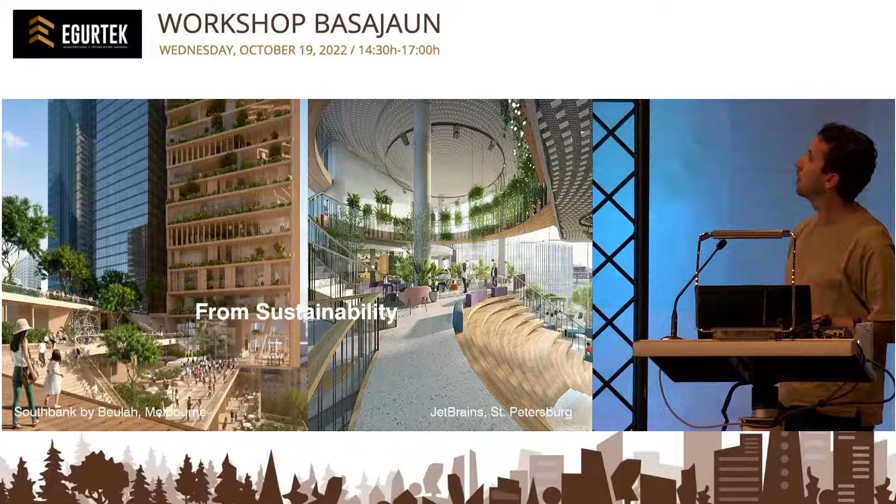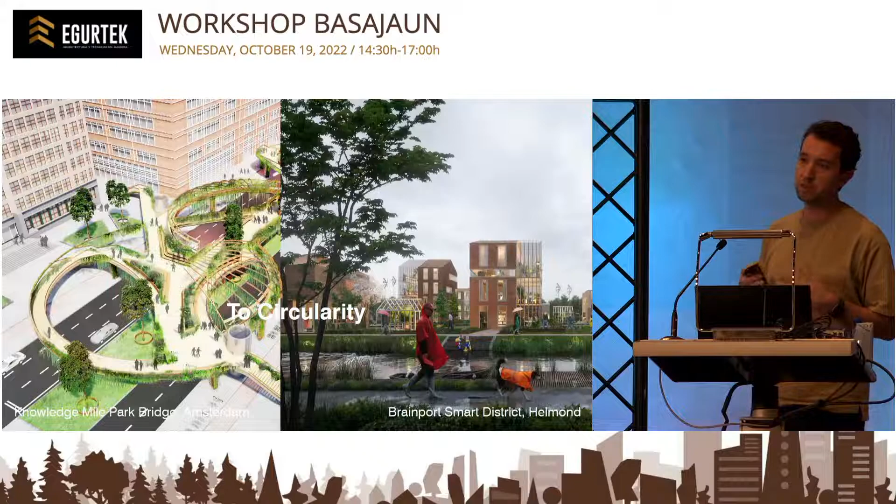So circularity we touched upon. Here are some projects from UN Studio, a project in wood in Amsterdam, also projects that have a lot of intelligence in them in the sense of sensors and computer-driven mechanisms that organize data and organize your life.

And eventually also energy positive buildings. So this is an educational building we did in the Netherlands, in Delft, partially in wood and also net positive in the energy production. And again, the smartest neighborhood in Europe.

So a range of projects, and today we would like to talk about Basajaun. It's a European funded research project with partners throughout Europe, from Spain, France, Finland, a number of other countries.

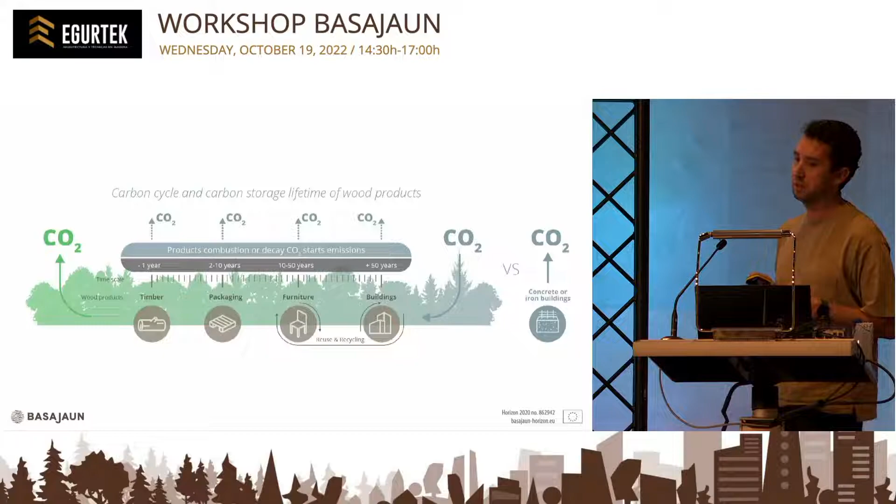And the goal was to look at the supply cycle of wood because of the obvious benefits of wood. It's readily available in Europe, it embodies carbon. And we wanted to use the supply chain of wood to include it into the building industry practice. And for that, the project is set up in a number of work packages, looking at these topics.

And each of them brings the knowledge to the project, first in digital form, then it's produced throughout Europe again, all the way up to Hungary. It's tested, and that's how we work together - up to now quite successfully.

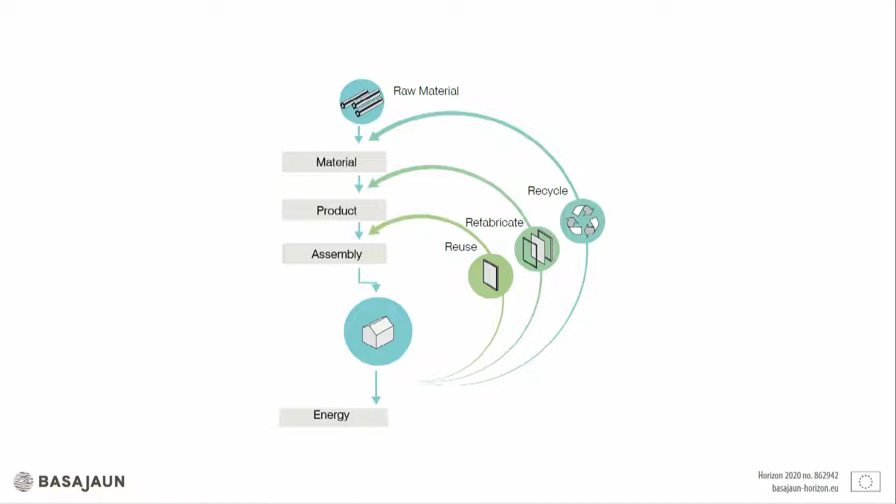And really looking at, we start with the raw material in the forest, so tree trunks, and then see how we can really upgrade it to a product and then assemble it in the architecture. First looking at how we can optimize the resources, then from forest products into sub-products, then in systems.

So a system in architecture is, for example, a window with a window frame, or a partition or a roof panel, all modularized and described in our computer model, and then put together to experimental pilot building.

And the last step, and I think that's at the end of the process, is also the fact you put everything together, but how can you take it apart in a smart way so you have the least possible amount of waste. So this goes back to cradle-to-cradle principles and how you can reuse materials in a smart way.

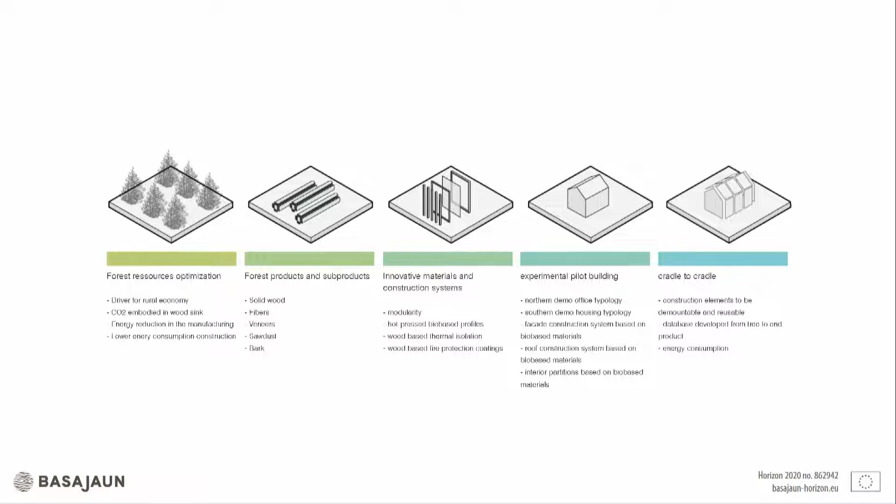So for the pilot buildings, I think those are nice to see. We have 2 pilot buildings. For the EU, it's very important that the topic is applicable over the wider European market. So we have 1 pilot building all the way up in the high north in Finland, and 1 in the south of France, in the Gironde.

And both of these buildings are dealing with very different culture of building, different climate. And in a way, these represent the different situations you might find in the European Union.

So this is Jyväskylä. Yeah, it's a beautiful site along a lake in the middle of Finland. And you see the extensive forest there. So this is definitely a theme. Here you see the project site.

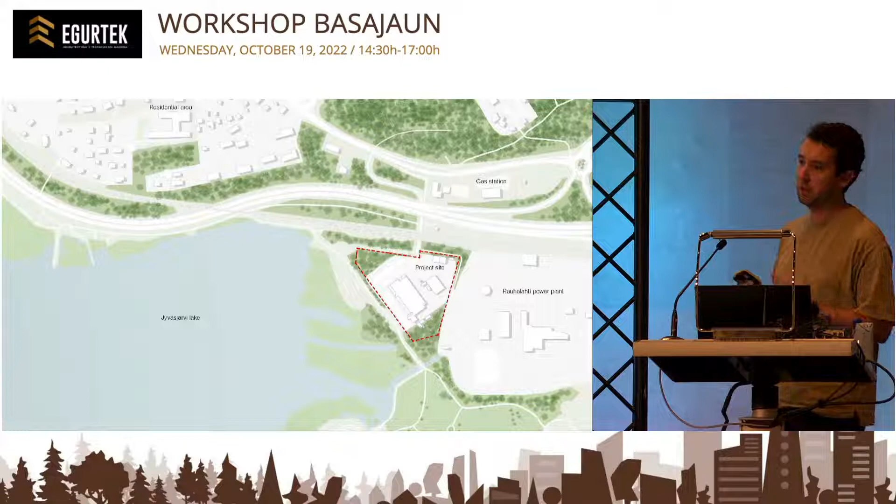It's on the location of our partner VTT. And the idea is that they have an office there, and the demo building we're making is intended to be a place where they can invite people, have meetings, possibly talk about this topic, but just a very kind of friendly and open meeting place with a nice view of the lake.

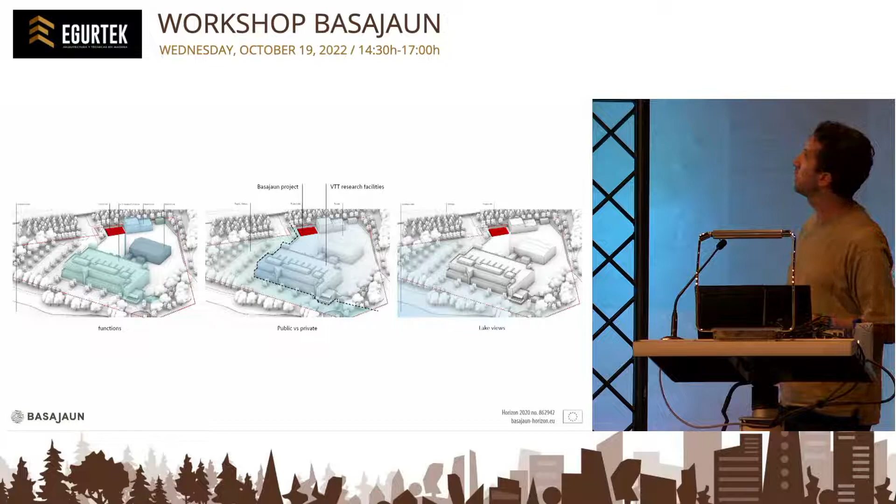We were inspired by the natural features. So the woods arriving there, and we tried to integrate it into the site. And what you can see to the top is the road coming in, and in the red location that's our plot. And it's the first moment you see the site, you see the building, and that's where your experience starts.

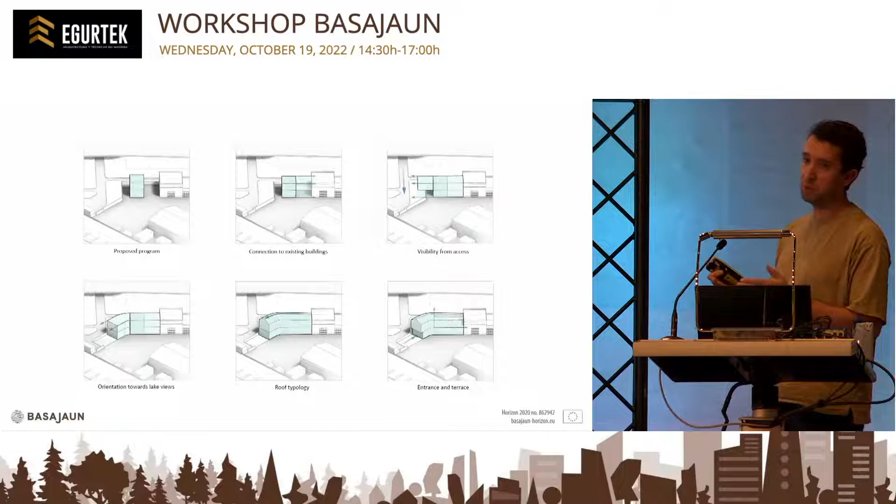There's been a whole process of different back and forth, testing things, looking at the geometry. But the key thing is that we connect to the other buildings. And the meeting space in the building has a very nice large window overlooking the lake. So here you see an early iteration. So we worked closely both with the partners and with VTT to see what the functionality of the building should be.

And at a very early phase, there were different manufacturers who looked at the glazing, the roof, the partitioning, and the facade.

Here you see the first design model, so it's just a sketch basically. But from the sketch, as you can see, we started to add more detail. Here you see all the interior partitioning in plywood.

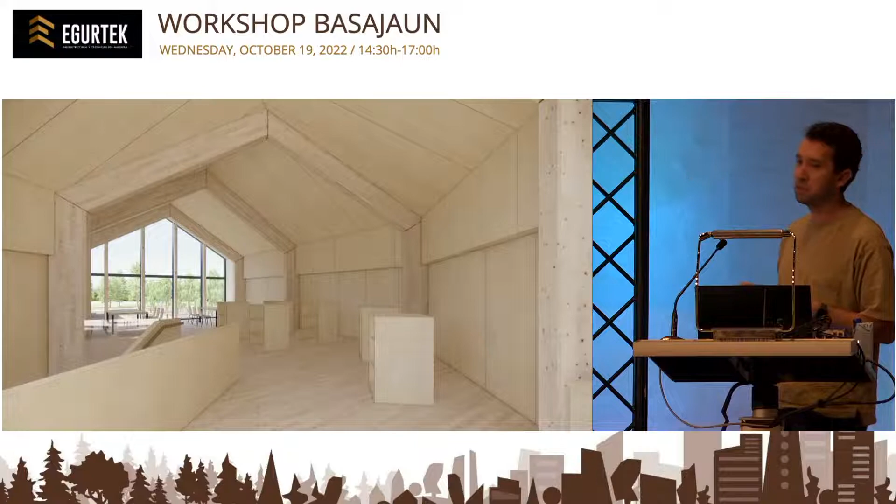Here you see some of the drawings generated in our building information model, in a software called Revit. That's where you can organize all these different building elements and track them back into the supply chain. That's quite a conventional procedure in the building industry, but it's our intent to go from the building back into the model and eventually to the supply chain in the forest, to really create that link within Europe. How do you use your wood?

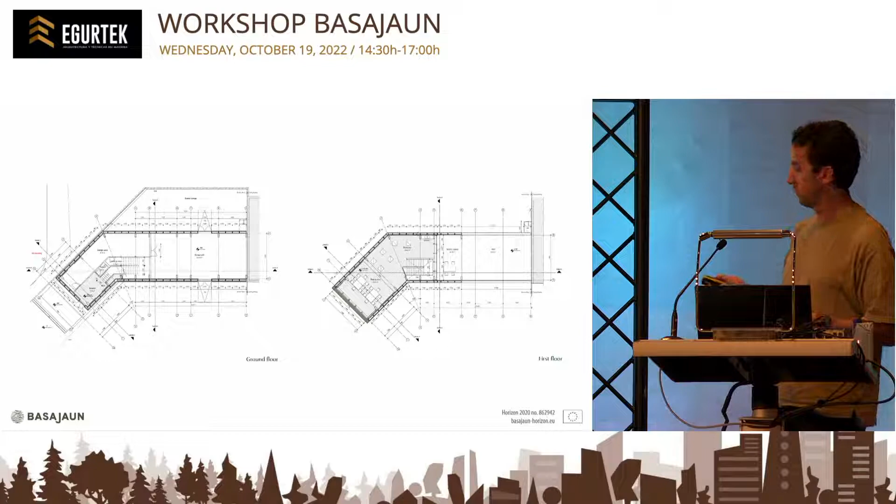Here you see sub-models between the main model. So a very important part is, for example, the structure.

The structure is a glulam structure produced by our partner Moelven in Sweden. They made the structural model, which is coordinated with the facade model from a company called I NAR from Madrid. This was done through meetings, but also in this digital environment, so we as a team throughout Europe could work together on this project.

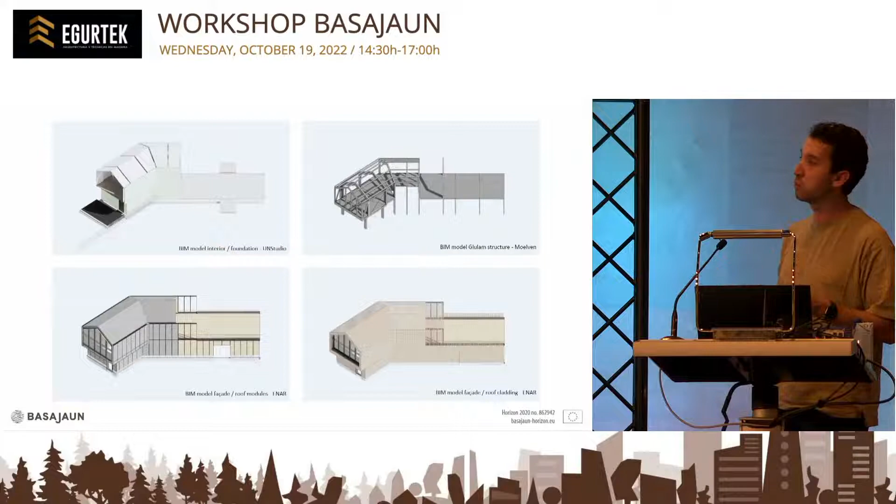Coming to the other building, this is the southern demo building. It's a residential project. There were already big plans for a school. We were not the architect of the school itself, but the architect was kind enough to let us take the residential part, the teachers' housing, for the Basajaun project.

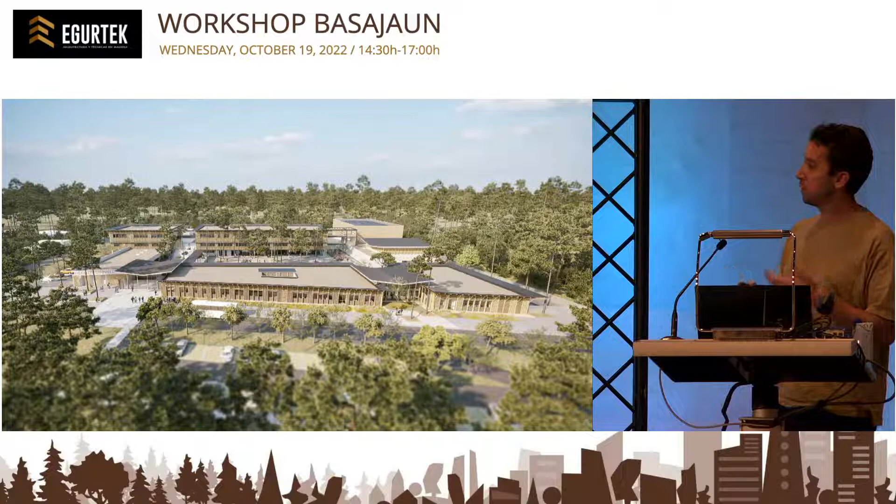Together with the French architect, we worked on that project. This school is built out of concrete on the inside, and on the outside it's clad with very nice wood. But for the Basajaun project, it was the goal to make the complete building in wood.

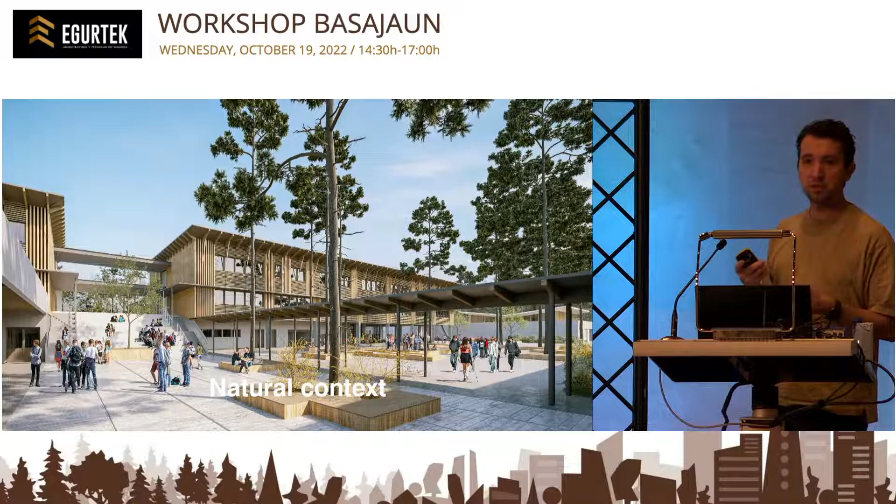So this is the project site near Bordeaux. Again, the school, just to get a feel of the existing design. In red, we are located next to the school. Together with the French architect, we tried to follow the initial design ideas so we could fit in with the overall site.

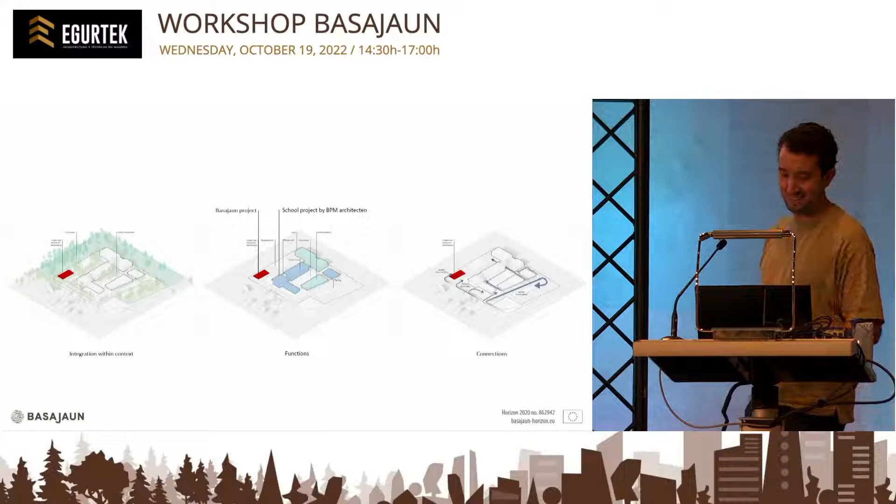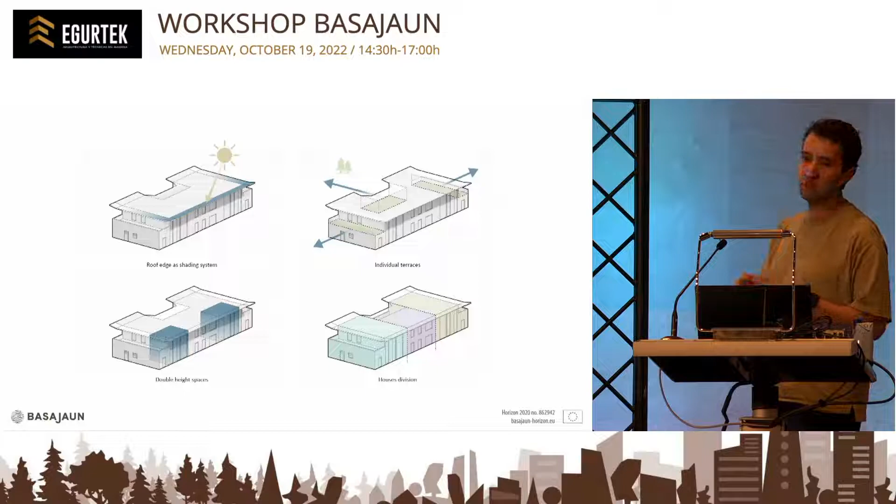Here you see a number of design exercises we did. Apart from working with wood, we also tried to apply sustainable strategies that we call passive measures. We looked at the geometry of the roof to provide shading, so the building requires less cooling. We did options on placing terraces and shaping these houses, and this is how the early sketch looked.

It was again coordinated in the Revit model. So you see here the three houses set up with all the modular elements that we are also providing for the finished project, so there's a system that can be used for both projects throughout Europe.

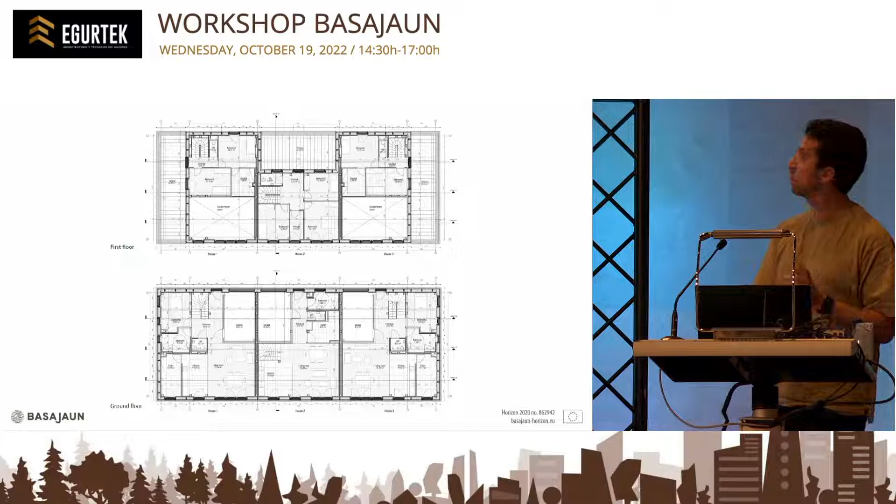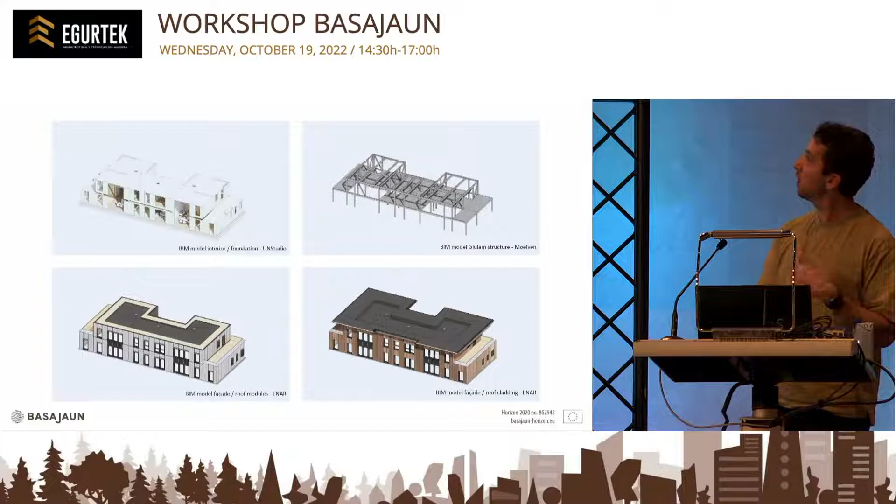With that system you can make very different designs. One is an office building and this is a housing building. Looking at the submodels, there's a similar story to how the intelligence is built into the project, but with very different results.

Then together with our partners, some of the systems, for example the windows, the partitions, and the roof, were also made smarter.

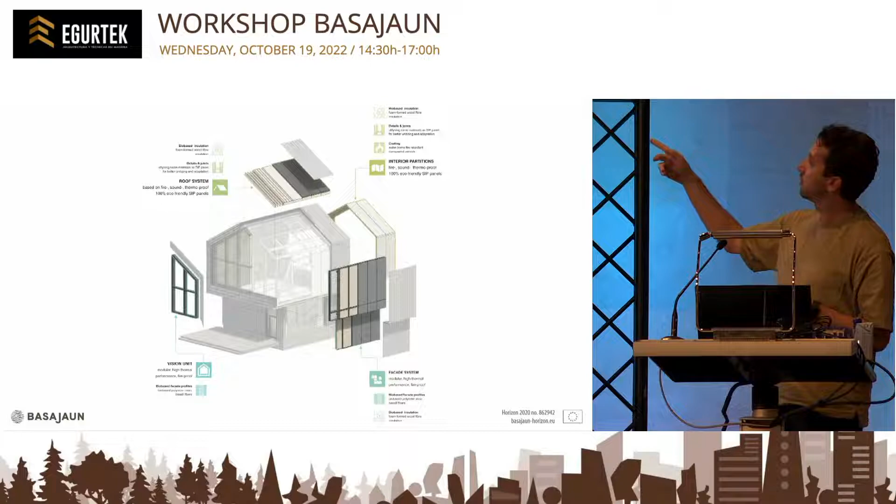Going all the way down to the technical details, like how this is assembled and what the different layers are, just to give insight into what's possible with this nice product. Here you see how the window is built up. Normally you'd expect window frames in aluminium or massive wood, but here it's done in biocomposite, which is very innovative and actually quite difficult to produce still.

But it's some of the more fundamental research that we are undertaking for the EU, and hopefully we can also bring this to the market later.

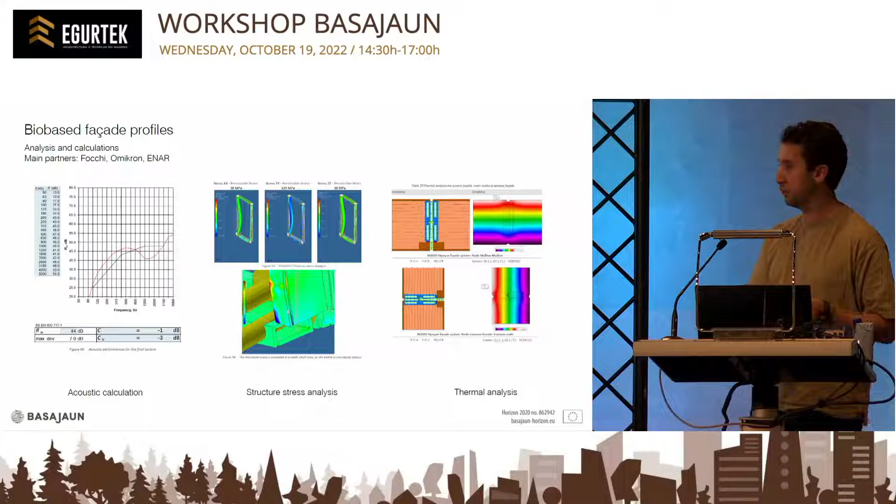All the testing needed, especially on new products. I think Finnish regulations are very strict. There are very strict procedures that you need to go through to get approval, so you're actually allowed to build. So we did testing on fire, noise, wind—all of this properly documented.

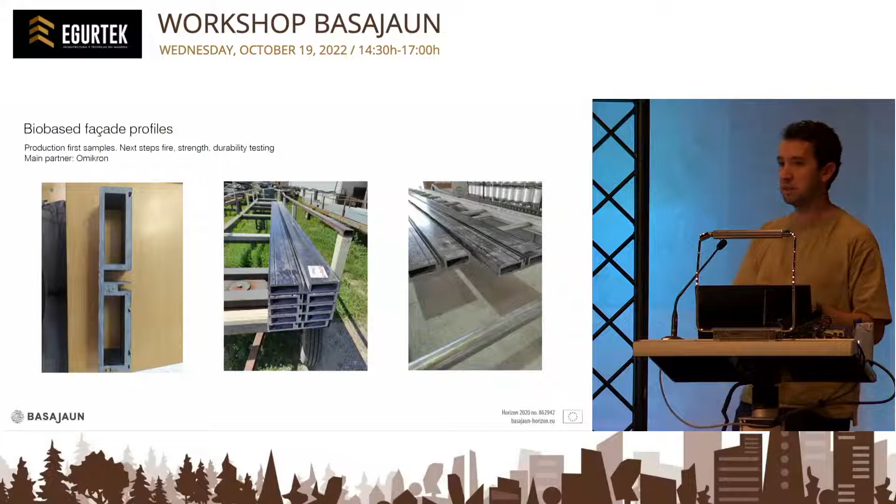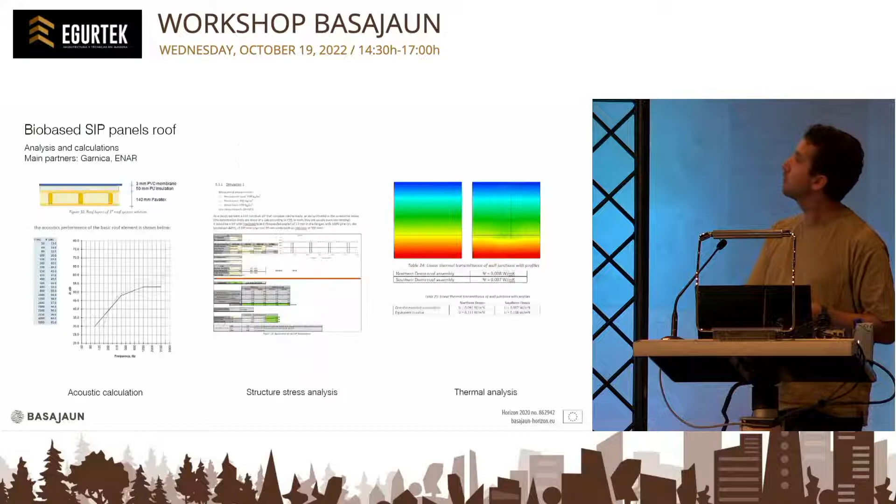Here you see some of the nice profiles. It looks a little bit like wood, but it's really based on this kind of composite. Here's how it's assembled in the factory, and here you see the roof panels. So that's roughly where we stand now.

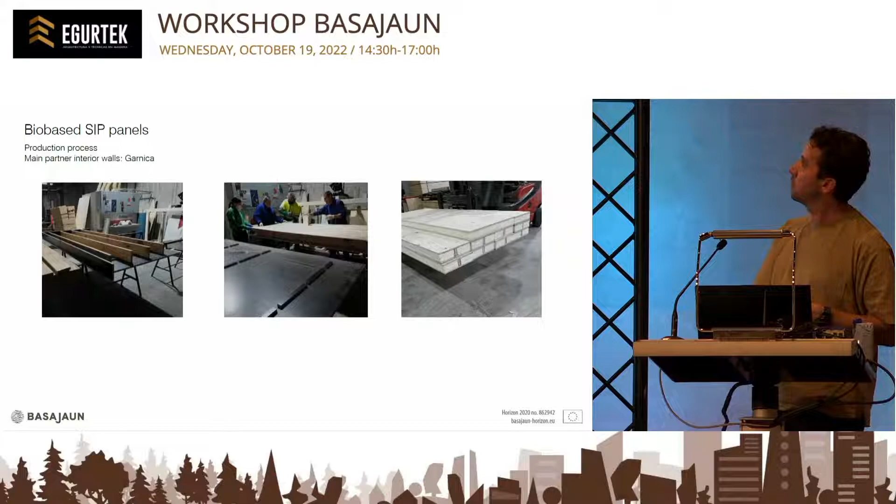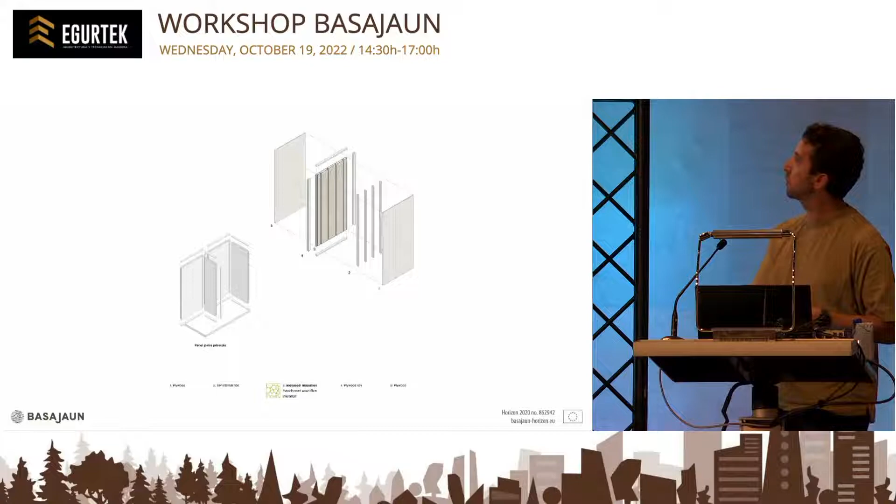The partition walls, and what I just want to touch upon still is the topic of: can it be reused? Also a very interesting topic. This has to do with how you put things together, and can you dismantle it later? If you put a lot of glue in everything, it's very difficult to take it apart and use the separate pieces in a practical way.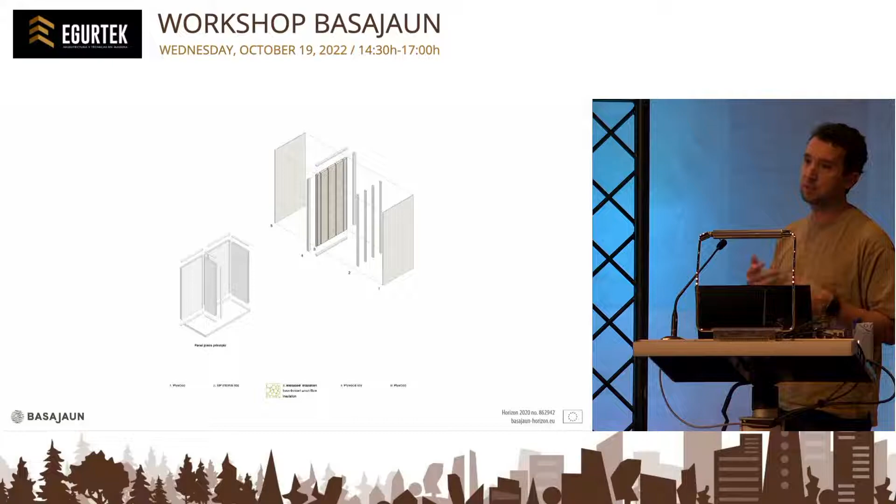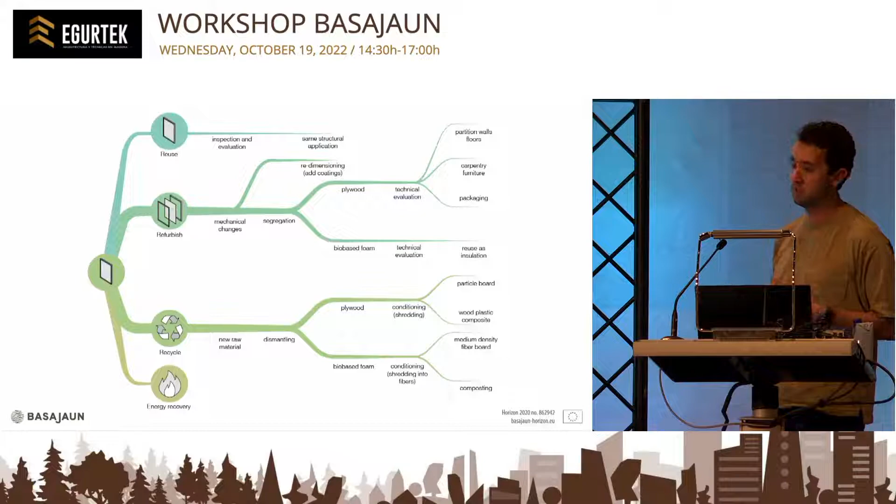But also in the detailing there's a degree of smartness to enable that. As we looked before at supply chains from forest into a product, into an architectural building, we could then turn it around and go from the building back to the window frame, to see what kind of future use it could have, to see if we can make this cradle to cradle in that sense. So testing is happening on that process too.

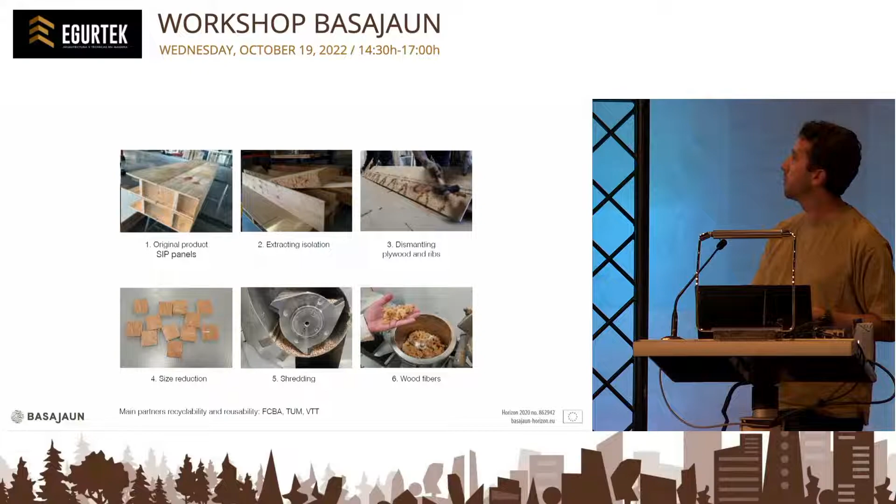So a lot of different engineering, designing, testing—a lot of fun stuff with wood. I hope I've given a nice overview also based on our demo buildings. And we'll finish with a movie just to give you a feel of what we're doing. So let me see if we can get this started.

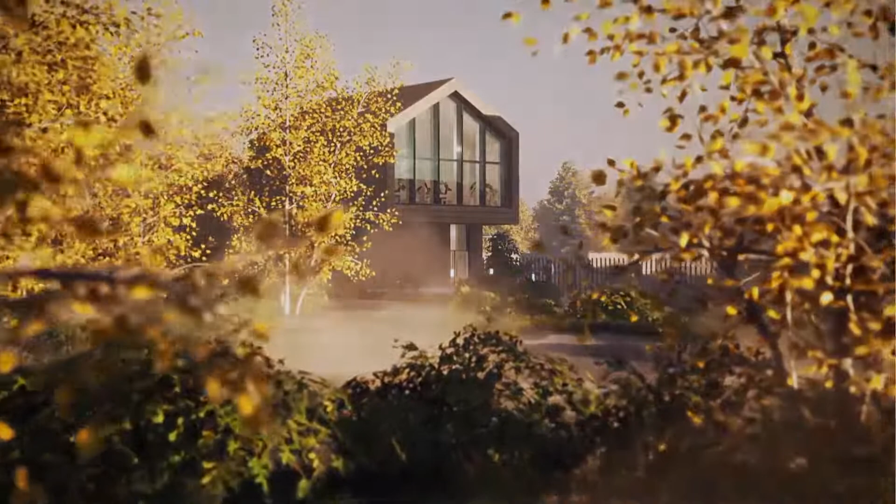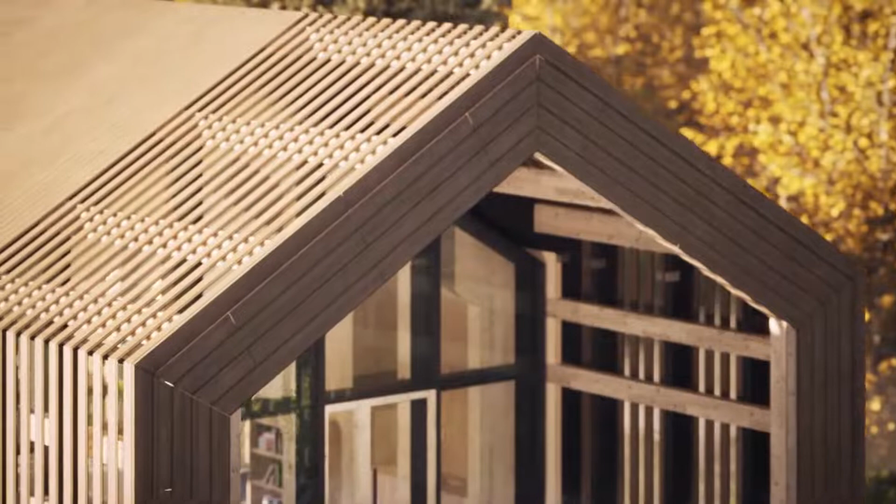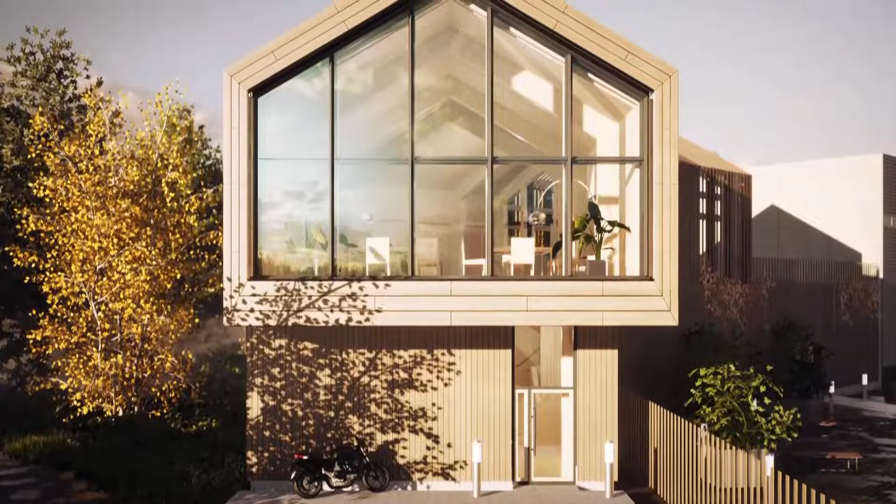Yeah. Thank you. Thank you.

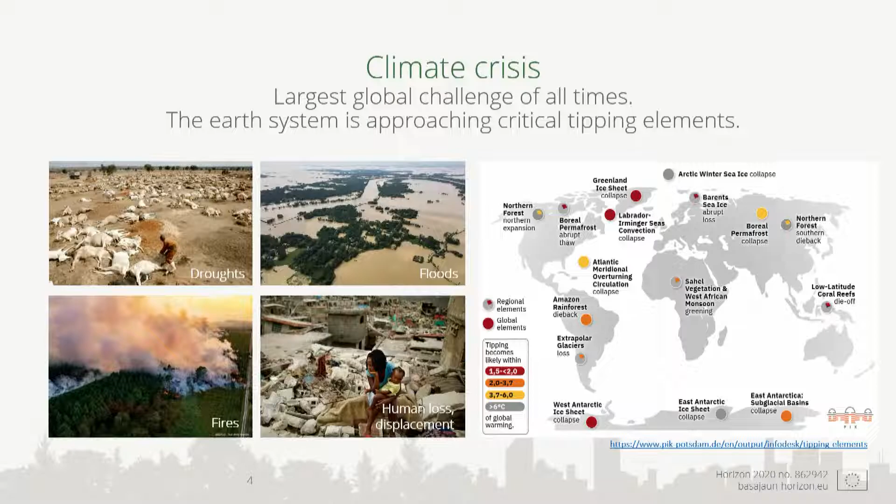If you look at this map produced by the Potsdam Institute for Climate Impact Research in Potsdam, if we are reaching a 1.5 degree Celsius world—and probably we will overshoot, reaching even a plus 2 degree Celsius world—the impacts are already very visible and happening in the global south, on other continents, but it's starting to become serious in Europe too.

So the plus 2 degree Celsius future lies ahead, but how do we adapt to that? And do we really do what's necessary today? Looking at the political decisions we are taking, and the way our lifestyle is emerging, I think this is the main issue. Although we have an energy crisis, we had COVID, we are still in an economic crisis, it will become serious.

What is also acknowledged in that context more and more since many years is that the built environment is a main factor. A recent, well-known study published in Nature found that humans on Earth have produced more stuff, more mass, than living biomass.

This includes the whole supply chain, the production of materials, the waste it generates. When we tear down buildings, we create a lot of waste and mass. And the trend is not stopping.

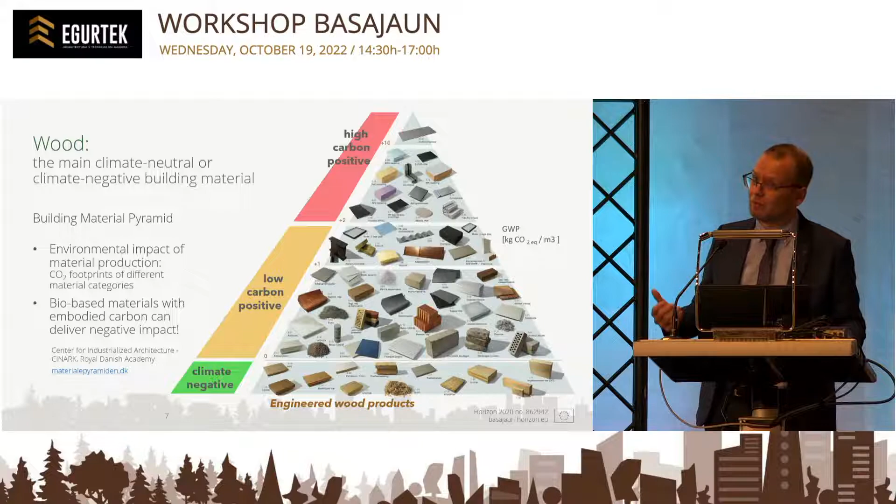If the supply chain is right—and of course life cycle assessments are very complex, depending on the country and the comparison—wood engineered products can even be climate negative. So if you build in wood, you can reduce the overall climate impact.

And if you think of our sector, the forest construction chain, in a larger context, this can really become a carbon pump to decarbonize, to take carbon out of the atmosphere. If we have sustainable forest management, we produce long-life wood products from it, and these are stored for a long time in the built environment, in buildings.

And then we also prolong this lifetime through circular economy uses and more ideas on how to use the material in the right way. Then this can become a carbon pump—cities can become carbon sinks on a larger scale if you upscale wood products.

This requires, of course, what we also demonstrated in the presentation before. We need to link forests to buildings to products. We need a digitalization of the supply chain.

We need to really manage that. It's not just that you use wood and immediately it's sustainable—there's a big risk that we overuse forest supply materials.

On one side we have to develop this supply chain in our sector, but we also have to reach out to all the other industries and actors in the built environment: architects, construction companies, urban planners, cities and regions as decision makers.

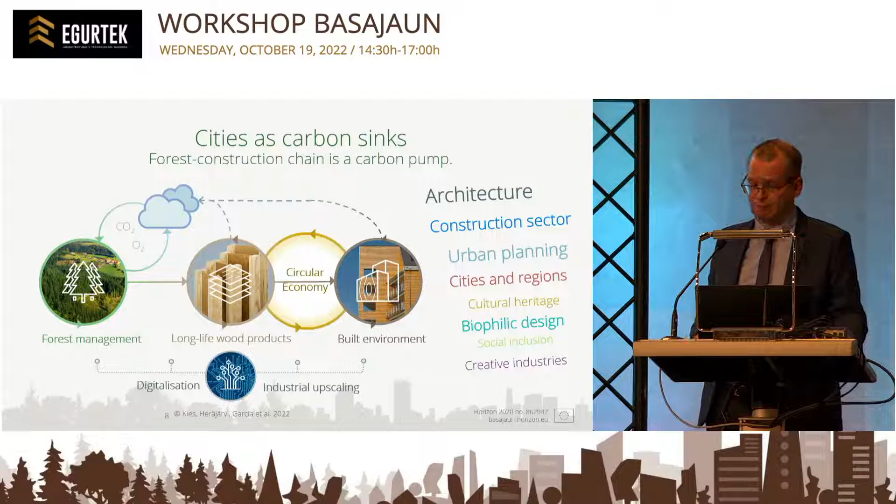How do we actually build the cities of the future, and so on? This idea is becoming very prominent on the European scale.

The President of the European Commission, Ursula von der Leyen, raised a lot of attention when she started the new European Bauhaus movement. One key phrase she stated already in 2020 when she took office: we know that the construction sector can even be turned from a carbon source into a sink if organic building materials like wood and smart technologies like AI are applied.

And the reason the President of the Commission is picking up this narrative is that very eminent scientists are addressing this topic.

For example, Professor Hans Joachim Schellnhuber, Director Emeritus of the Potsdam Institute, but also many other climate scientists, address this topic now and say we need a solution to decarbonize the built environment.

His main statement, heard in many of his speeches now, is: we need to reforest the planet, retimber the cities, and then timber construction can become a silver bullet for climate change. So this is the political context and narrative which is really coming in favor of wood today.

And I think Basajaun came at the right time. We now have demo buildings being constructed, and we have all these solutions, so we want to show these results and disseminate this more.

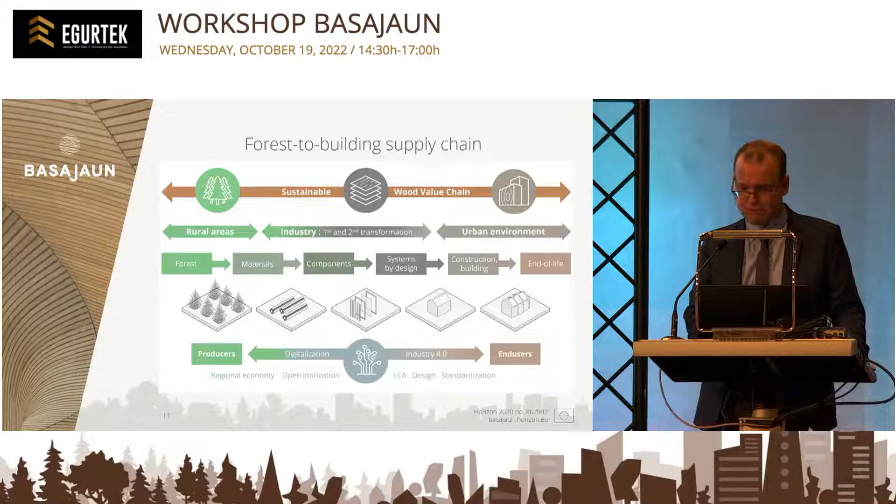And we are addressing this forest-to-building supply chain, from forests to products to the built environment, various aspects, and important questions as circular economy, end of life, systems by design and digitalization.

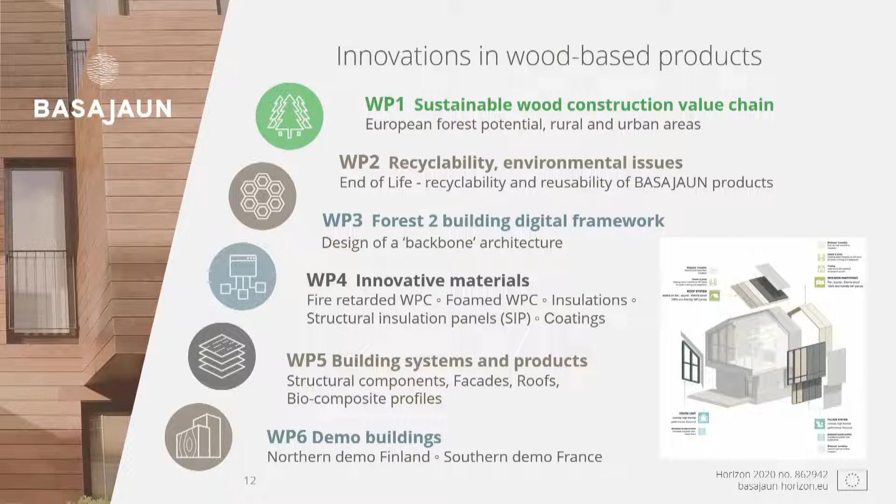The project is comprised of 6 work packages where these different topics are addressed. I will go a bit fast here because we want to go to the discussion, but from forests to materials to building products and to innovative systems which end up in these demo buildings. Just a few pictures to highlight that there are various different innovations developed together with the companies, tested and approved to be part of these demo buildings.

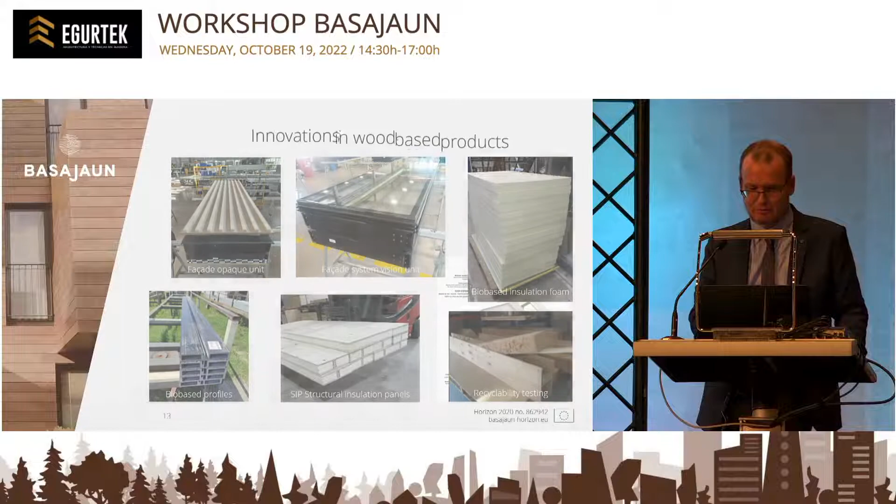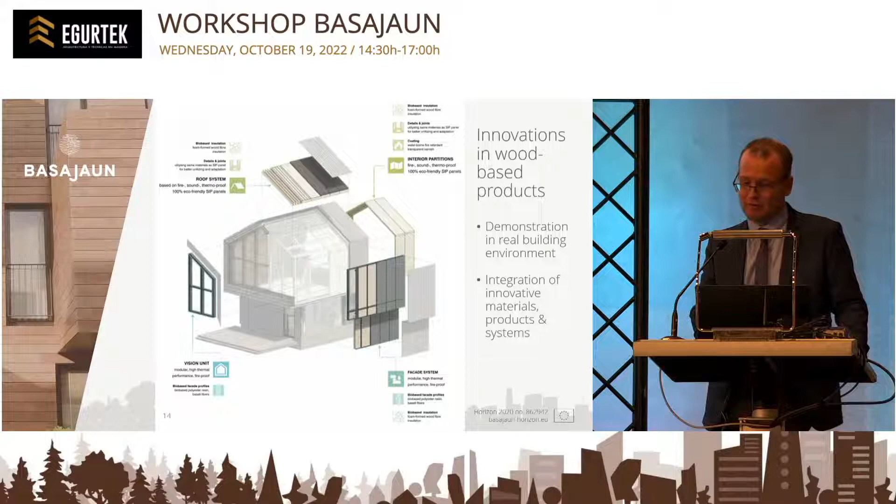This is again the system view, so that all these different components can be integrated, which is actually quite challenging, to integrate innovative materials and products, because we have to adapt to the regulatory framework. The 2 demo buildings, we have seen that in the presentation from UN Studio. Again, some views.

Another step where we are actually currently working on in the project is that we want to make the link to the rural and regional development. So we have 5 pilot regions in Europe, 2 in Finland, 1 in Poland, New Aquitaine in France, where also the main demo building will be constructed, and also the Basque country.

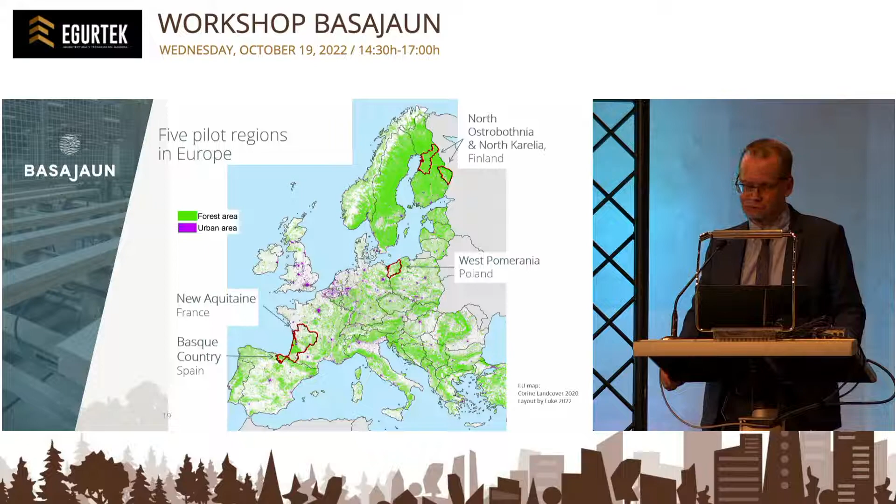Within these regions we started to assess what actually the wood construction chain looks like, what are the stakeholders, what are the main actors, what are the research and development needs for the future. We are also working on a series with stakeholders to get feedback and inputs from the people in the innovation ecosystem there. We will discuss this a little bit later also.

We have put together a complete publication, a first one on this, transformation needs of wood construction sectors in 5 European regions. It was published by one of our members in the consortium, the Natural Resources Institute Finland. This is a first overview of where we are with the project, and we hope to discuss a little bit more later. Thanks a lot.

Now we continue with the third part. The third part is related.

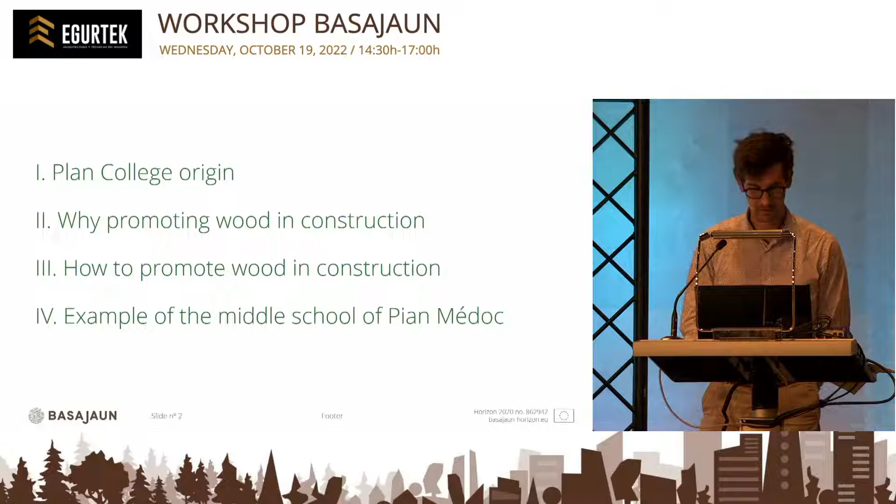Gironde has been gaining an average of 20,000 inhabitants each year since around 2008, and the demographic forecast predicts an increase of students until 2025. That's why the department, as the public authority who builds colleges, decided in 2017 to set up significant financing to create and renovate existing colleges.

That's what we call Plan Collège 2024, because the objective was to build most of these colleges by 2024. So there are 14 new middle schools and 10 existing middle schools that we are renovating.

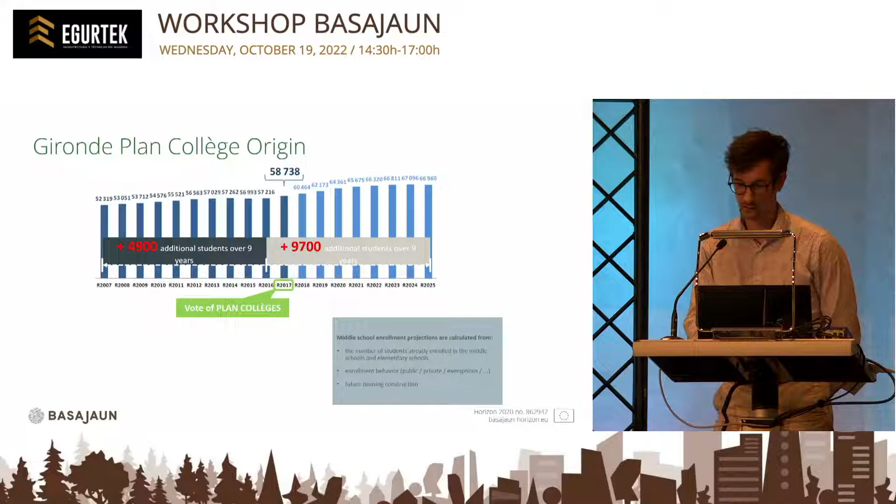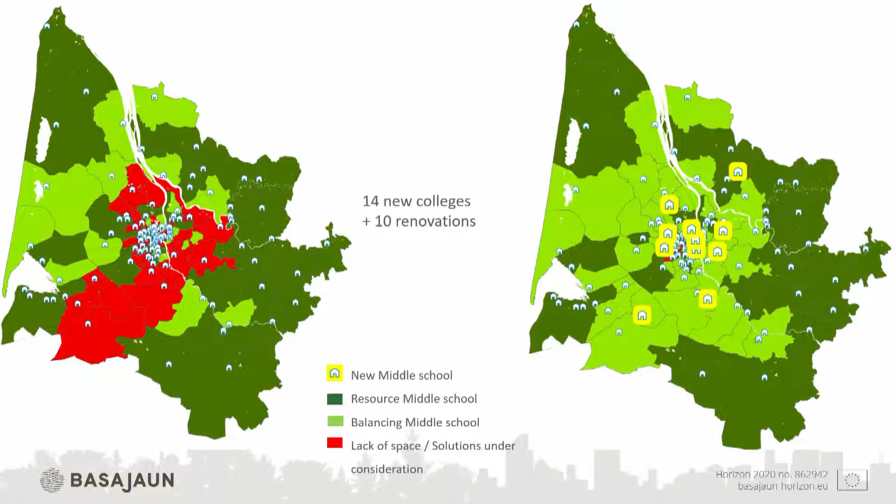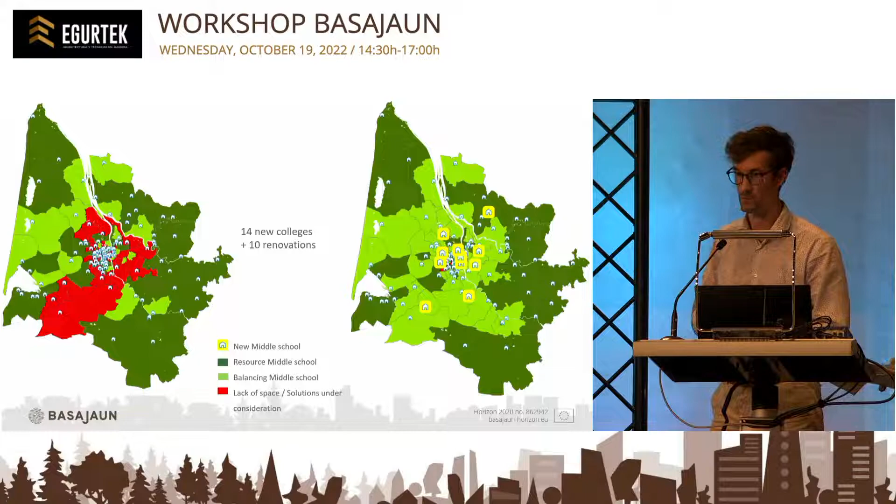After that, we created a new map with the yellow symbol, a small house on the maps on the right, to create new colleges and respond to the demand. This year there were 6 colleges completed in September, when the pupils could start the new year in a fresh building.

So let's get to the point. Why are we promoting wood in the Gironde department? First, because of the policy framework: the EU directive asks public authorities to reduce carbon emissions, so we have to do this as a public authority, which is what a department is.

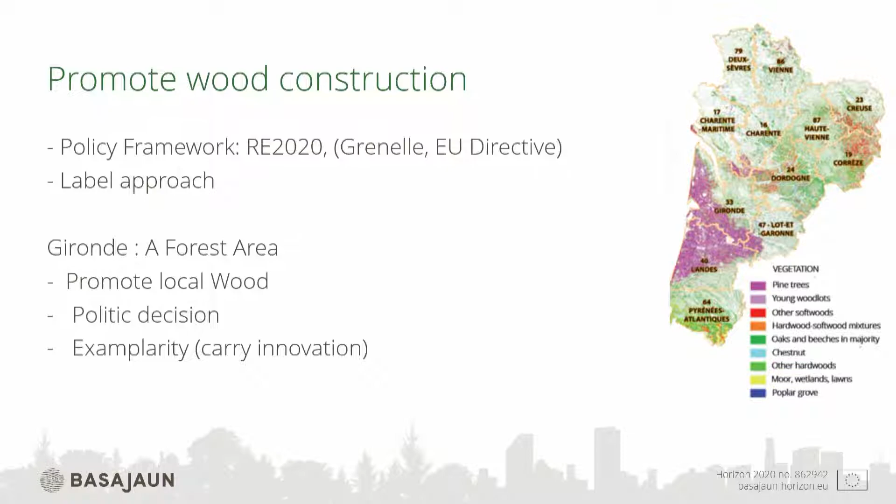France decided to be a precursor and implemented a regulation from 2012 on specifications to build buildings, and another regulation in force from this year, January, called RE 2020 - the environmental regulation.

So the department wants to contribute to the achievement of national goals and participate in building biosourced, low carbon emission buildings, because we think public institutions should be role models regarding innovation and can develop more use of wood in the construction sector.

And these projects are also helping to raise the awareness of citizens about sustainable building and living.

So about public procurement, we say our Plan Collège is a good practice, a good example of public procurement, fostering wood construction in France.

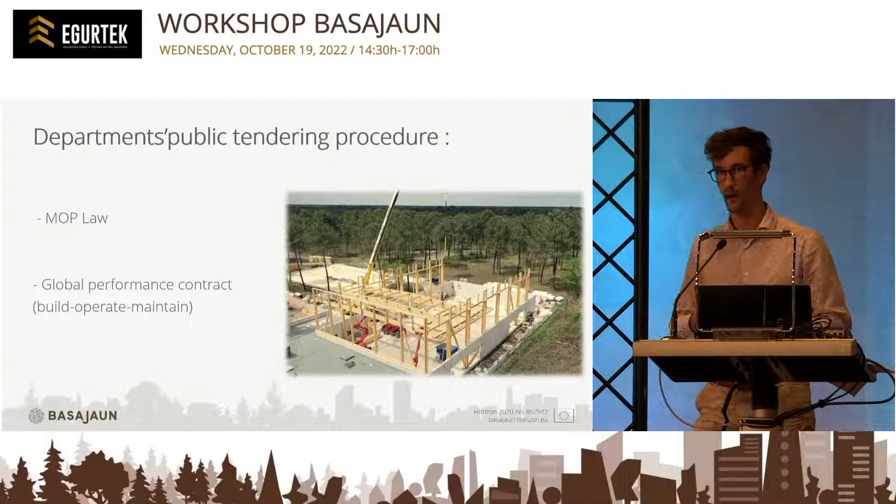But the second tendering procedure possible is called the global performance contract, which is like a build, operate and maintain contract that we can find in other countries in Europe. This one doesn't really respect public procurement in the usual sense, but we use it to make sure that one contractor will be committed from the beginning to the end, committed to an environmental objective, which is usually an ambitious one.

So to achieve these ambitious environmental buildings, we do a program that asks for exemplarity in environmental construction with certain specifications, for example the use of wood or other biosourced materials. We also demand candidates reach a level required by specification certification labels on environmental specifications.

The label we use is called E+, C-. The E stands for energy, the C stands for carbon, which measures the carbon we emit all along the life cycle of the buildings, from construction to exploitation. This label permits us to constrain the constructor to reach ambitious environmental objectives.

And another thing in public procurement is what's called the tender rules, which describe the conditions under which the candidate proposal will be assessed. We give priority to technical criteria over price when choosing our contractor. For example, for our colleges, we use only 20% of the assessment for price, and the rest, 80%, focuses on local economy, environmental and architectural impact.

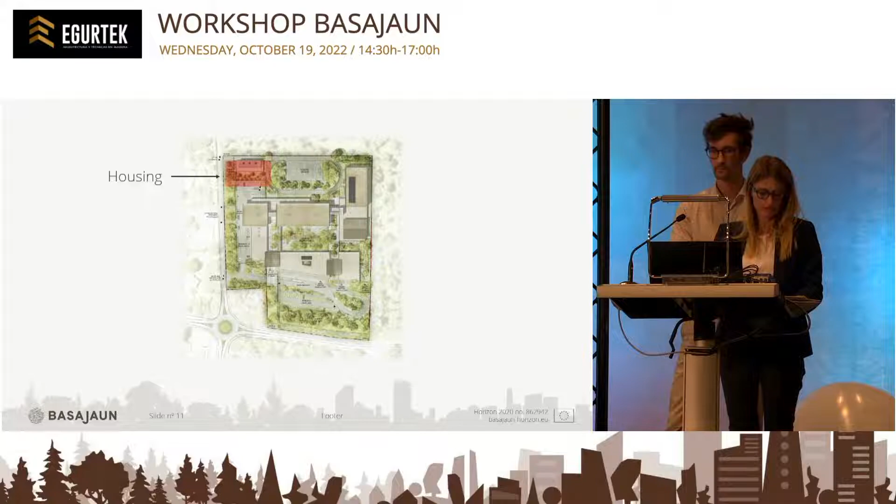The Basajaun housing will be built on the north part. The new college at Pian-Médoc is a main showcase for wood construction in the Gironde Plan Collège.

The department of Gironde included a specific requirement dedicated to wood material: the wood had to be promoted visually on the spot. This ensures that the buildings fit well into their natural surrounding forest environment, as the college is located in a rural area in the middle of landes, pine and ash forests.

The college was opened in September and welcomes 800 school children from two communes in the sector.

To reach the demanded high level of wood, the construction site needed to use at least 80 liters, or cubic decimeters, of wood per square meter. In this school, the figure has reached 190 liters, or cubic decimeters, per square meter.

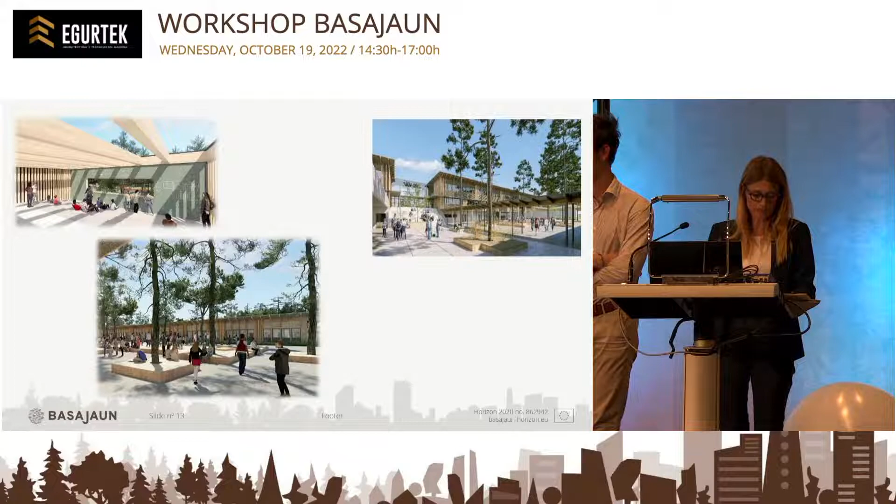A second aspect of this construction is that part of the wood materials used for building actually comes from the construction site itself. Further wood materials have also been used in the school building, mainly for insulation, frames and cladding.

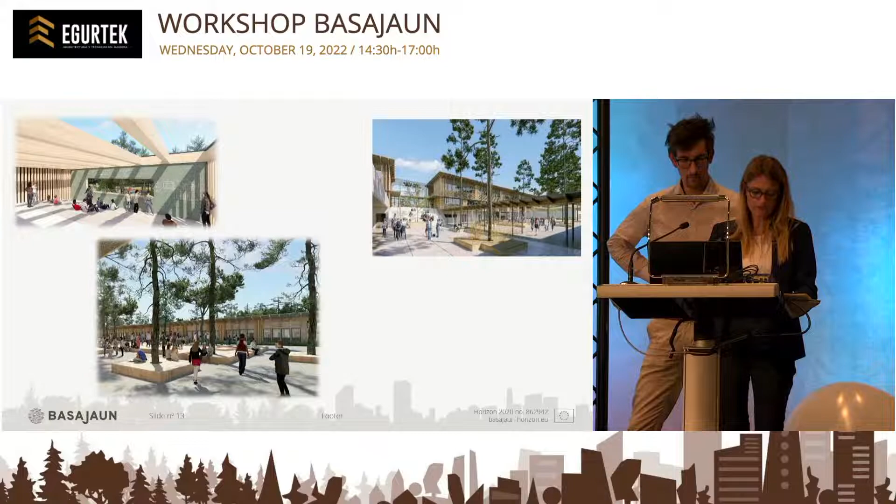On the environmental level, the project has adopted ambitious criteria, with the search for the experimental E+C label, the use of biosourced materials, the search for energy efficiency in buildings, and compensation measures for biodiversity.

Environmental programme: the first point is to respect the site, keep the wood from the plot and use what has been cut, to have a project that integrates with the landscape and in which one feels good.

Reducing the impermeability of the soil by using permeable materials for parking, allowing infiltration of rainwater on the plot, and developing ecological spaces. Number 2: low consumption.

Energy efficient, with energy production from approximately 200 square meters of photovoltaic panels.

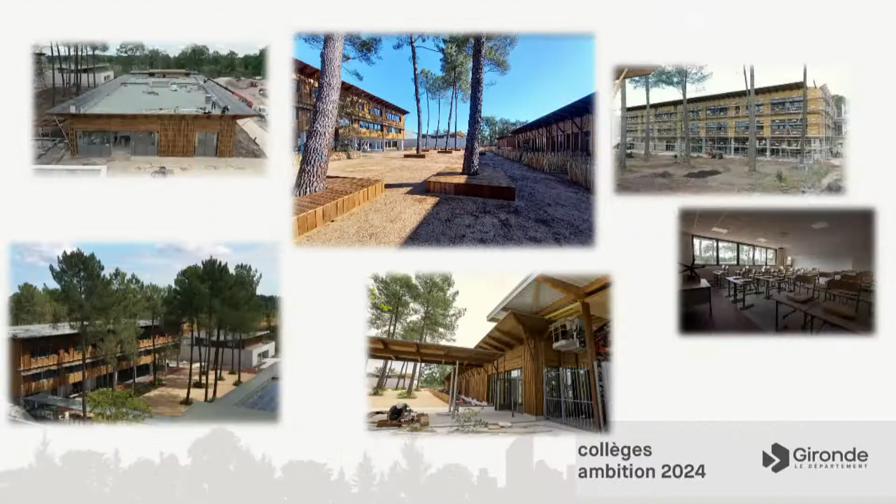Wood type and location: vertical cladding in maritime pine, with wood sourced from the land and plot of the college.

One of the major levers to promote the use of local wood was the reuse of wood from the plot. However, the stock was not sufficient to carry out all the facades, so for the sake of harmony, the architect had no choice but to use the same wood type throughout.

Finally, the college incorporates innovative organizational and operating principles: the volumetric organization of the playground, gender-neutral toilets, a new organization of the canteen and the outdoor terrace, and an outdoor classroom to take advantage of the site's biodiversity.

The new college was very well accepted by the children and by the school director. Thank you.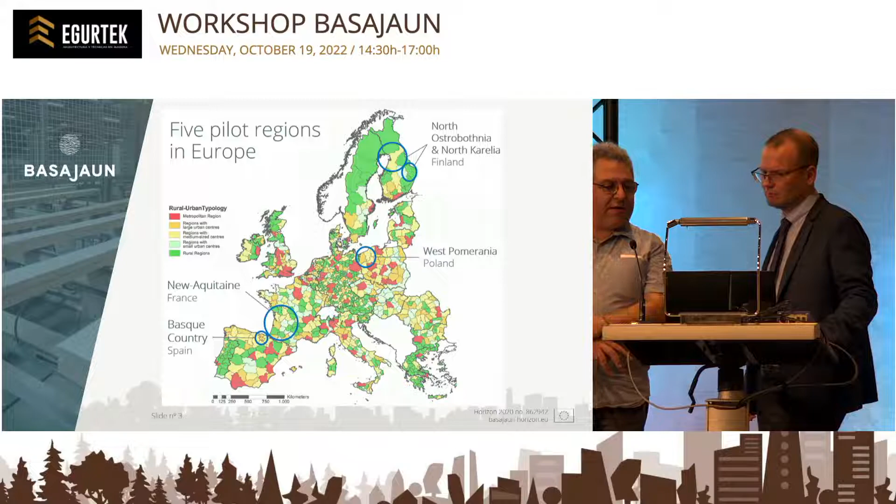First work was to make a comprehensive assessment of the pilot regions, and we finished this in 2022.

And we published this work on Luke, that is our partner in Finland, on a bioeconomy series communication publication.

So, and now we're following up with task 2, which actually ended in September 2022, and there we started drawing our open innovation platform. This is why we revised a little bit our approach, and now we're talking about building the foundation and not building the open innovation platform.

Because an open innovation platform would be very big to handle in the time we have and the focus that we are having. So we're building the foundation, and now we are seeing what we have to interact with to get that open innovation platform active and living, standing alone after the Basajaun project.